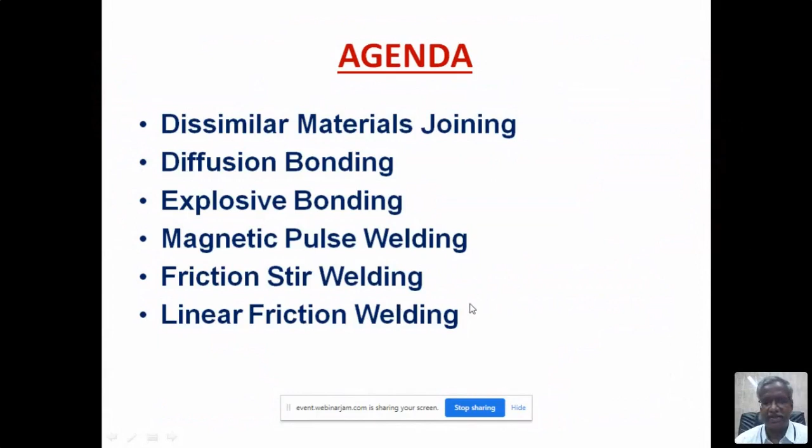So today I just want to share my experiences with joining techniques for dissimilar non-ferrous alloys. I will try to cover based on the time limit available. Briefly, I will introduce the concept of dissimilar material joining. There are many joining methods available, but I want to focus on these 5 joining technologies in today's lecture.

So why do we need to join dissimilar materials? Mainly, in the present day, whether it is a transport vehicle, aircraft, or shipbuilding industries, the main motto is we need to reduce the weight of the structure. To reduce the weight, in some portions of the components, we need to replace the high density material with a low density material. So that's one reason.

Another reason is there are methods to improve energy production and also to create the next generation. Even in the medical field, we need to create a lot of medical products and medical devices, and many other manufacturing industrial uses require joining of 2 different materials. Actually, there are 3 different classifications of dissimilar materials.

Here it shows joining of different types of metal. So two types of metal: one is steel with nickel, copper with aluminum, copper with stainless steel. If you see that, the melting point is different. Steel has a different melting point, and nickel has a different melting point.

Similarly, copper and aluminum. Copper's melting point is 1050 degrees centigrade. Aluminum's melting point is 650 degrees centigrade. Similarly, copper with stainless steel. So these are entirely two different types of metals.

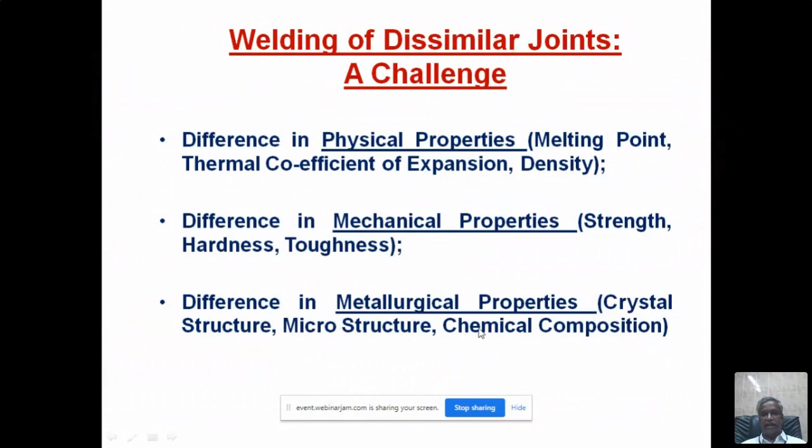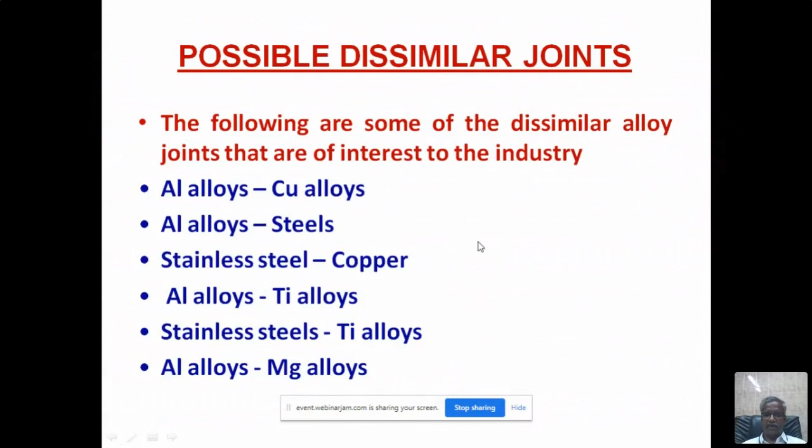So these are all challenges, because joining a similar category of material is itself a challenge. But when you want to join two different types of materials, it is a big challenge for welding engineers. So there are many combinations now used in industry: aluminum with copper, aluminum with steel, stainless with copper, aluminum with titanium. Different combinations are worked out, and they are successfully welded now.

So there are many methods, many techniques, many technologies used to join dissimilar materials. For today's lecture, I want to cover five different processes which we have facilities for in our center, and we also did a lot of work on these processes.

I want to share some of the experiences of this. So first one is the diffusion bonding process. Diffusion bonding is mainly caused by the diffusion of atoms, the movement of atoms from one location to another location. This movement of atoms will occur mainly because there is a gradient, a thermal energy gradient, and then the atoms will move from one place to another location.

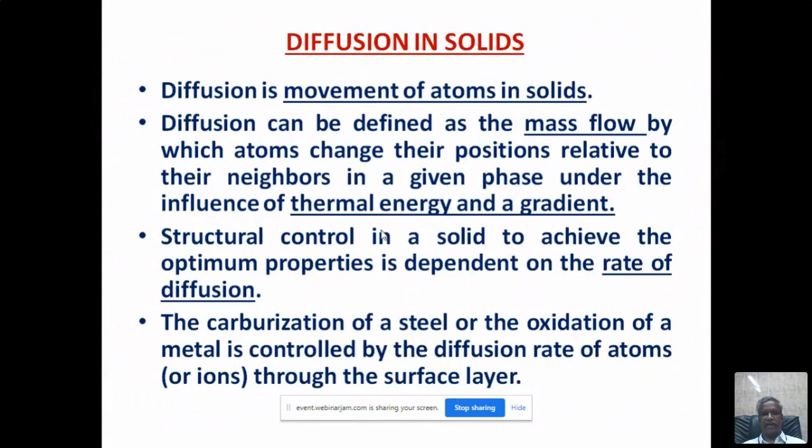There are many examples, and if you see this, I want to join copper with nickel, copper alloy with nickel alloy. These red atoms are copper atoms and these blue atoms are nickel atoms. You require high temperature. When you heat to high temperature, these red atoms will move towards the nickel side, and nickel atoms will move towards the copper side.

So there is a concentration difference between them, and in between they will meet. Copper atoms and nickel atoms will meet, and they will form some intermetallics, and by that the bonding is occurring here. You can see in this diagram clearly. Copper atoms move in this direction, and nickel atoms move in this direction; from copper, it is moving here.

In this case, for copper and nickel, the atomic size is almost similar, so they are replacing. If the nickel atom moves towards this side, there is a vacancy produced here. That vacancy is filled by the copper atom, which is moving in the opposite direction. Like that, the vacancies created by the movement of atoms will be filled by the movement of atoms from the other side. So after diffusion bonding, if you measure from the top surface to the center, the copper concentration will vary, and nickel concentration also will vary, as shown in this graph.

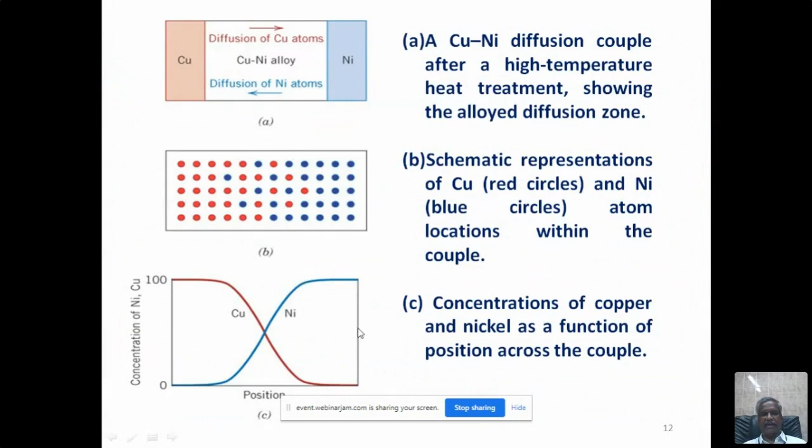And there is a law, popularly known as Fick's law. There are two laws. One is steady state diffusion, the other one is non-steady state diffusion. In steady state diffusion, the diffusion rate is not a function of the distance and the time. But in the non-steady state, it's a function of distance and time. That's called Fick's second law.

For this diffusion process to occur, there must be an empty site, a vacancy site. And the second condition is the atom must have sufficient energy to break the bond, because between the atoms there is always bonding. Metallic bonding is there, ionic bonding is there, you heard about covalent bonds, and there are forces like van der Waals forces.

So if one atom wants to move from its original location to another location, first it has to break its bond from the neighboring atom. Only then it moves. To get that energy, it requires an external source of energy. So when you heat, they get the energy, the atoms break from that bonding, and then it is free to move from its original location to another location. Even then, there should be a vacancy, then only it will move. Otherwise, it cannot move.

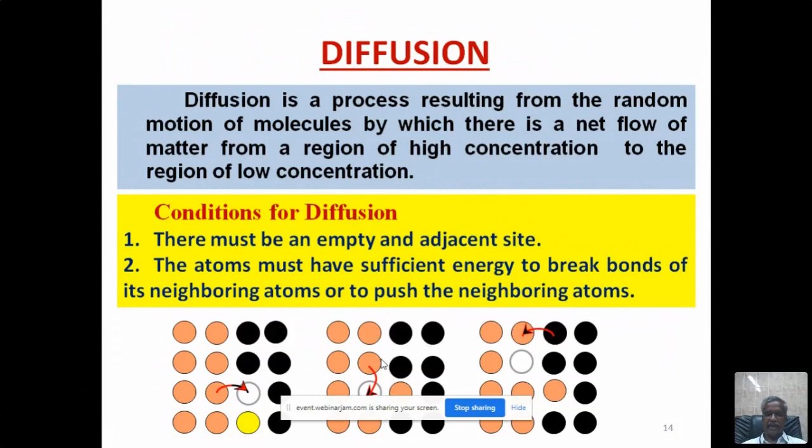If you see here, there is a vacancy. This white spot is the vacancy. So this pink atom will move to the white space, the vacant space. In the next one, this area will become vacant, so this atom will move from the top to here. In the next case, this will become vacant, so this atom will move here. So cyclically, movement of atoms will occur.

So this is the basic: when you want to join two different materials, the atoms will move from one material to the other material. To move the atoms, you need some temperature. You need to heat the material. Only then the atoms will move by breaking the bonds between the atoms. So basically diffusion bonding is a solid state welding process.

Why is it called a solid state welding process? Because there is no melting at all here. In the solid state itself, well below the melting point of both the materials, the bonding will occur. Normally, people used to say welding means there should be heat, and that heat should melt the material. The material will be taken to the liquid state. In the liquid state, coalescence or fusion will occur.

But in the solid state welding process, there is no such phenomenon. The welding or bonding takes place well below the melting point, so the material will not be taken to the liquid state. In the solid state itself, this movement of atoms is happening, and because of that, the bonding is occurring. So there is no macroscopic deformation. Microscopically there will be deformation, but at the macroscopic level there will not be any deformation in this process.

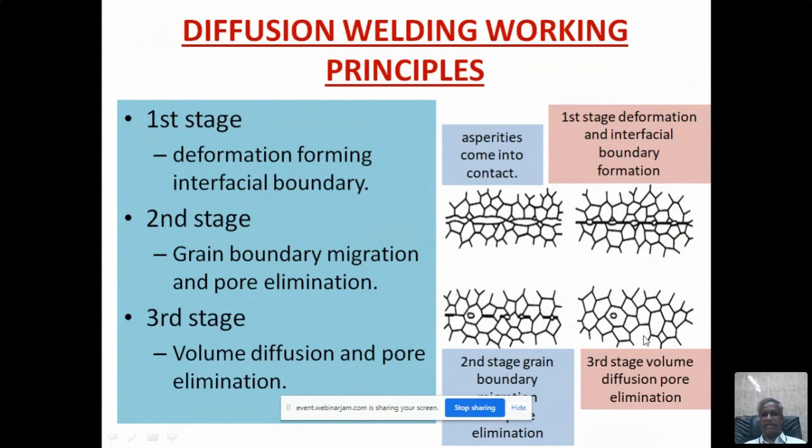In diffusion bonding, you have two types. One is solid phase diffusion bonding, the other is liquid phase diffusion bonding. In solid phase diffusion bonding, there is no melting at all. In liquid phase diffusion bonding, they use interlayers. Interlayers are low melting materials, and those interlayers will melt. That's why they call it the liquid phase diffusion bonding method.

Normally, for both types of diffusion bonding, you require a vacuum atmosphere. The air will be completely sucked out. Vacuum should be maintained, and heat is supplied by induction heating, along with pressure. So these are the main things: you require vacuum, heating, and pressure. The process also requires a good surface finish on the metal surface, normally in the range of 0.4 microns, and the surface should be as clean as possible.

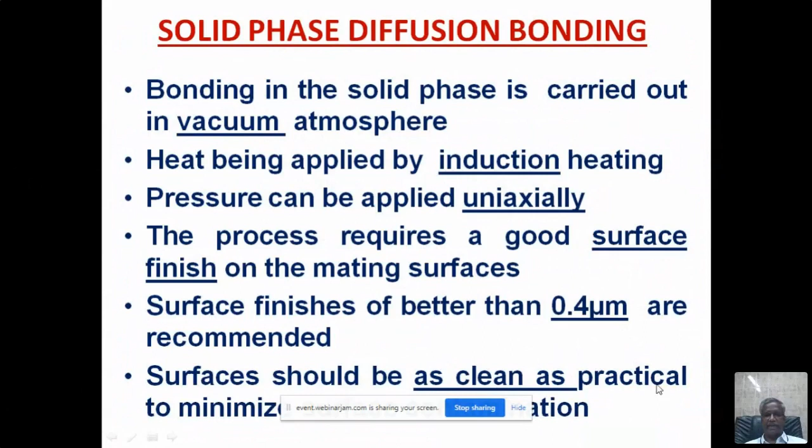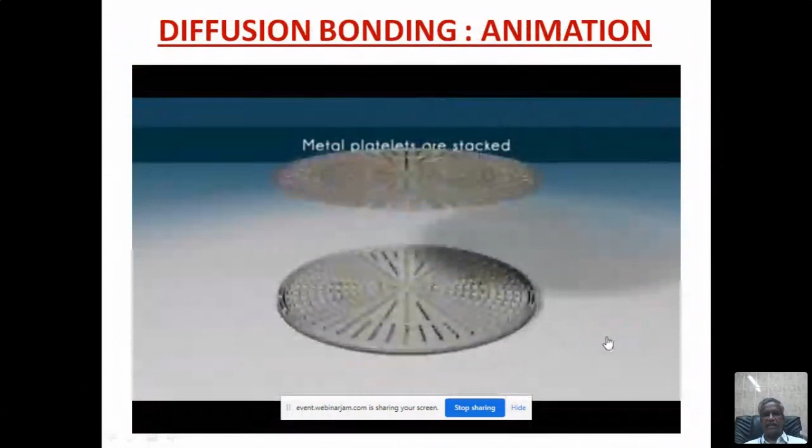There's a small clipping animation. You can see first they are stacking the metal. You can stack any number of metal plates. It is based on the furnace volume. So now dynamic load and heat are applied.

So when the heat and the load is applied, you see that the grains are migrating. Migration of grains and closure of the pores. And once it is closed, then you will not see two different materials. So this is an example for the similar materials.

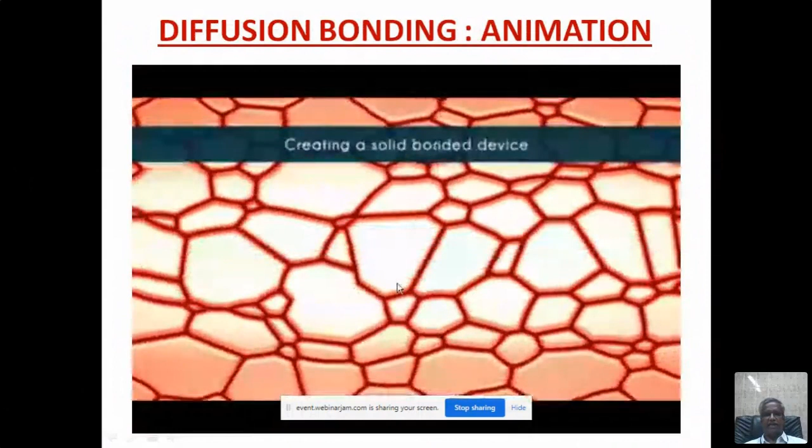So the liquid phase bonding is applicable for dissimilar material combination because in dissimilar material, as I told you, there is a difference in melting point. So the melting point differs. For example, suppose I want to join aluminium with stainless steel. Aluminium's melting point is 650 degrees centigrade, but the stainless steel melting point is 1550 degrees centigrade. So enormous difference, nearly 900 degrees centigrade difference.

So if you heat at 700 degrees centigrade, aluminium will melt. But if you don't heat to that temperature, what will happen? Nothing will happen to the stainless steel. So in that case, they use dissimilar inserts. The inserts are normally silver. Silver will be used. Sometimes copper also will be used. The low melting inserts will be used in between the two different materials.

So the inserts will melt, and the melting will make the inserts in the liquid state, and they will spread onto both the surfaces of the top plate and the bottom plate, like how it happens in brazing. So this is called liquid phase diffusion bonding. So here there is no melting in the materials to be joined. Only the inserts, which are low melting material, will melt. So that's why it's called liquid phase diffusion bonding.

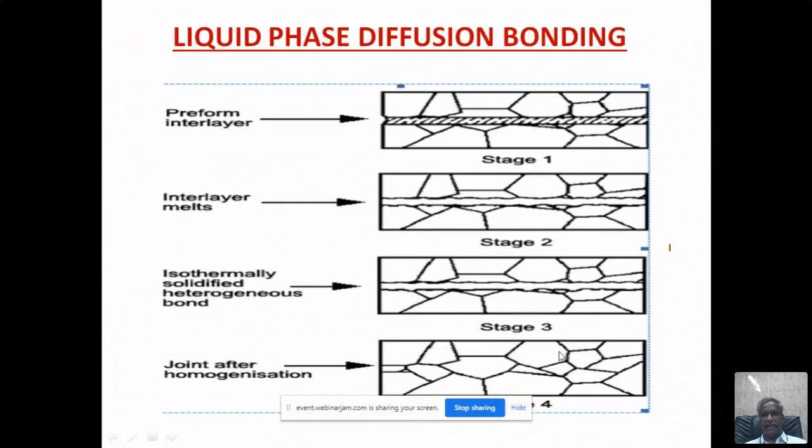So here this is the interlayer. They will keep it like this, and in the second stage the interlayer melts, and in the third stage it is heterogeneously bonding, and the molten interlayer will spread to both the sides, and it will cause the bonding between the two materials.

And there are a lot of criteria that should be considered for diffusion bonding. Surface roughness, it should be 0.4 microns. Bonding pressure should be high enough, but it should not exceed the yield strength of the material. Because if the bonding pressure exceeds the yield strength of the material, then deformation will occur. So you should maintain the pressure well below the yield stress.

And another important parameter, bonding temperature, is decided by the recrystallization temperature. Normally, it will be kept between 50 to 70% of the melting point. This melting point is based on the lowest melting point material. So if you have aluminum and copper, you have to take the melting point of aluminum into consideration, and use 50 to 70% of that melting temperature.

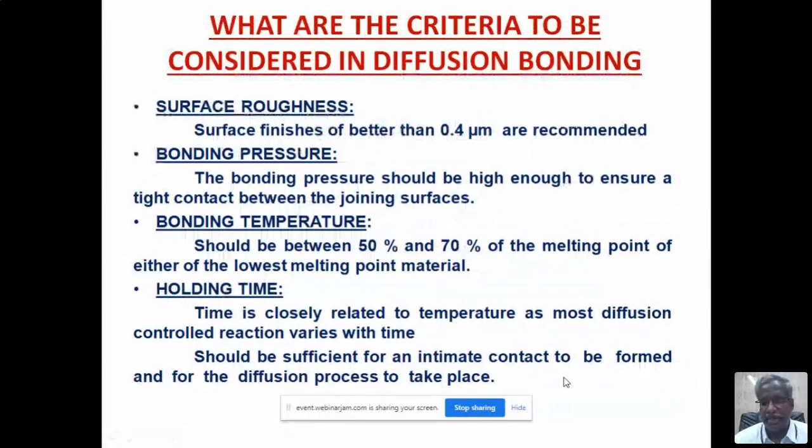Holding time normally varies from 30 minutes to even 3 hours. So it's a long process, a slow process, but some components which cannot be joined by conventional welding methods or any other methods, you can join by using this method, though it is very slow. The productivity is very, very low, but it is required in some applications.

So one case study I will show: we did a lot of work on joining aluminum alloy with magnesium alloy, and this is aluminum alloy. The big challenge is that aluminum and magnesium are both non-ferrous metals, okay? And at the same time, both are lighter in weight, and if you see the melting points, they are almost equal, 600 to 650 degrees centigrade.

There is not much difference in the melting point, but it is very difficult to join these two alloys, aluminum alloys and magnesium alloys. The reason is the crystal structure. Aluminum alloy has FCC, face-centered cubic crystal structure, but magnesium alloy is HCP, hexagonally close-packed crystal structure.

The density is almost the same: aluminum alloy is 2.7 and magnesium alloy is 1.7. Melting point is also close, magnesium alloy is 600 and aluminum alloy is 650 degrees centigrade. But the main problem not allowing the material to join is the crystal structure being different, so they are not compatible.

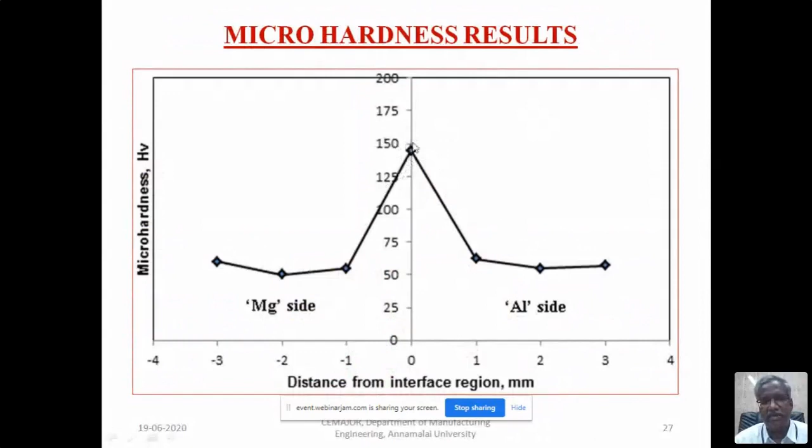For this condition, AZ31B and 6061 were joined using the diffusion method. We did a lot of trials and found that 430 degrees centigrade, a pressure of 50 megapascal, and a holding time of 30 minutes is found to be optimum. That means under this condition, the joints made yield maximum bonding strength.

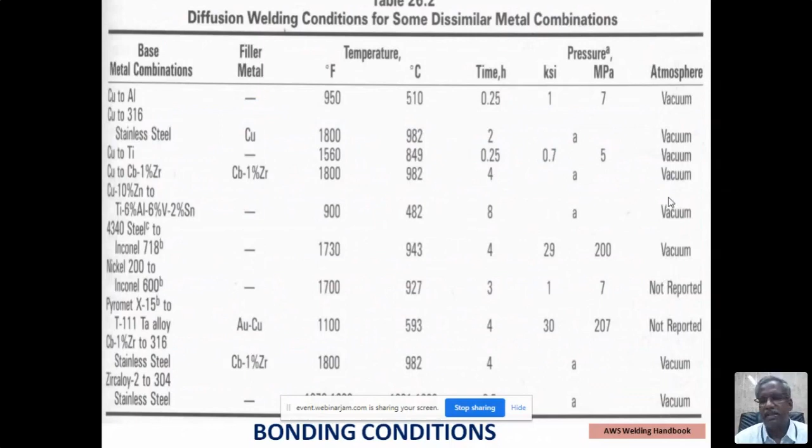There are many combinations of materials available, and people are doing it differently, but if you see, all of them are done in vacuum. So vacuum is a must. Normally they use a vacuum level of 10 power minus 5.

There are a lot of applications in the aerospace industries, because it uses aluminum alloy, titanium alloy, and nickel-based alloys. There are a lot of locations and components where you need to join these different materials. Here's a small video clipping so you can understand this.

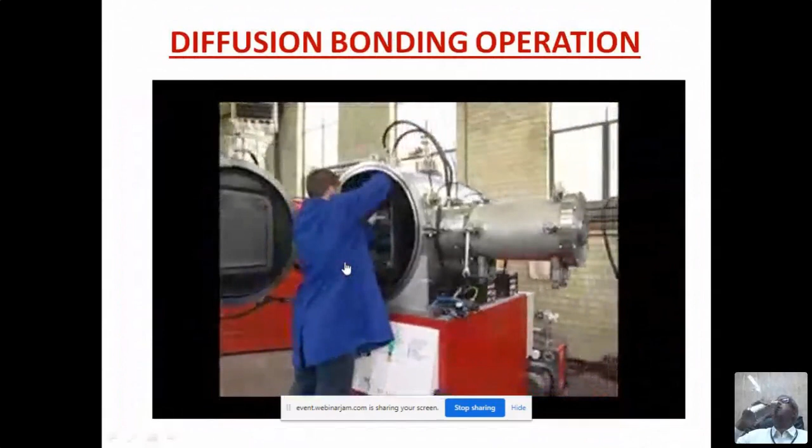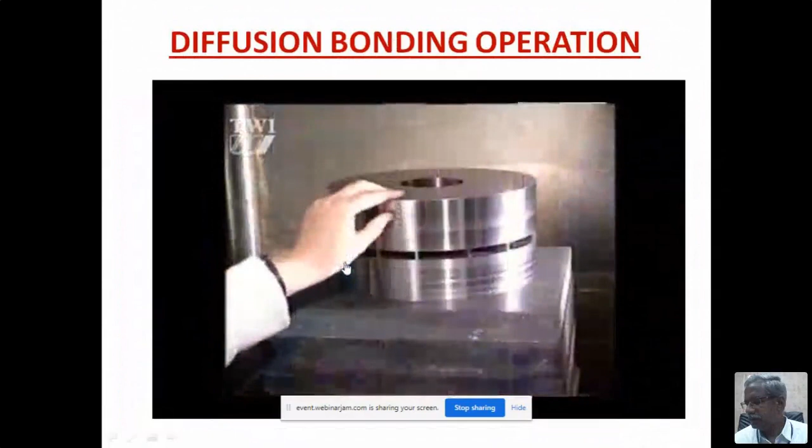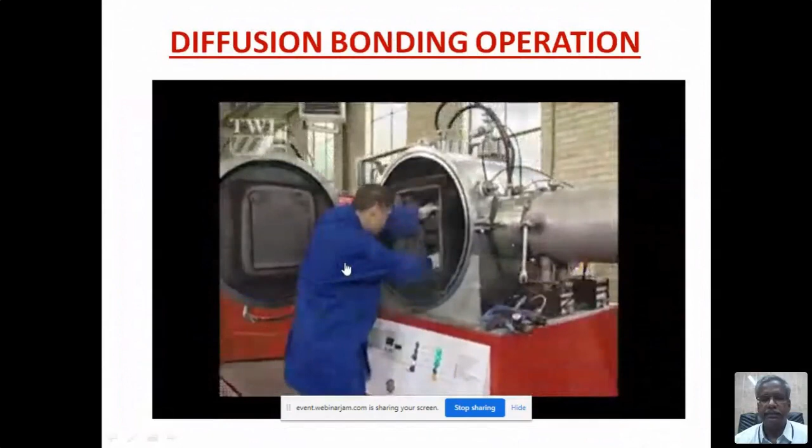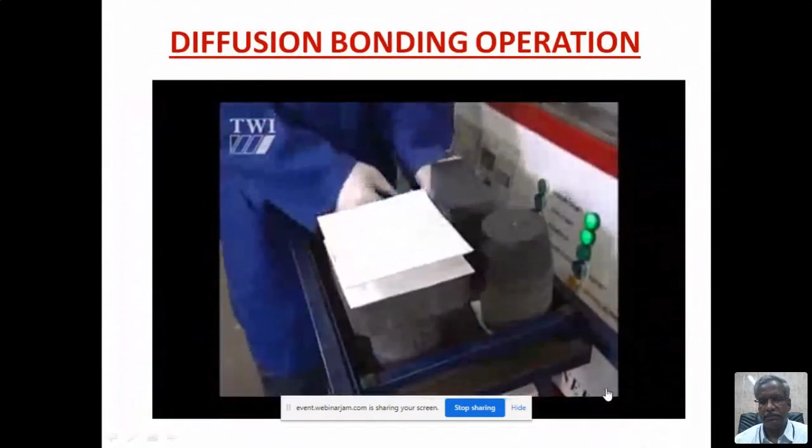It's a very simple process. The equipment is really not a lot more than a hot box with a press running through it. It works on the principle that if you heat components up to the point where the atoms on the surface have enough energy to start jumping across the gap, then they will bond together. So you would take two components with a very good surface, push them together, heat them up, and wait. You form a bond which is metallurgically perfect. If you took a section through that bond and polished it, if you've got the conditions right, you won't be able to see where the bond line is.

And if you then did tensile testing, you would expect the failure to occur in the parent rather than the joint. The new machine is a bit different.

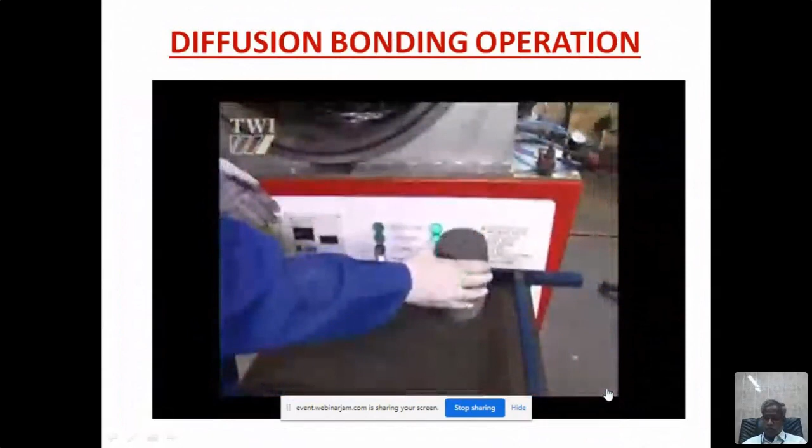Most machines work with a vertical press. This machine has been built with side ports so that we can put the extension tubes on and swing it around horizontally. That way, we're not really limited to length.

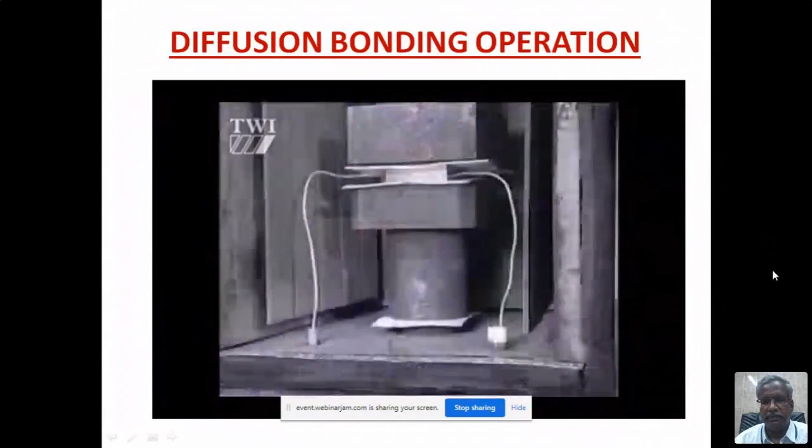Load will be applied. Put longer and longer side pieces on, load is applied to components like tubes, rods, or bars. Measure the temperature. It's a slow process compared with arc welding. You're very unlikely to be able to complete it quickly.

So, the furnace. Inside the furnace, they are stacking the two plates to be joined. This gives unique advantages. For example, it's completely closed, and the suction pump is used to evacuate all the air from there.

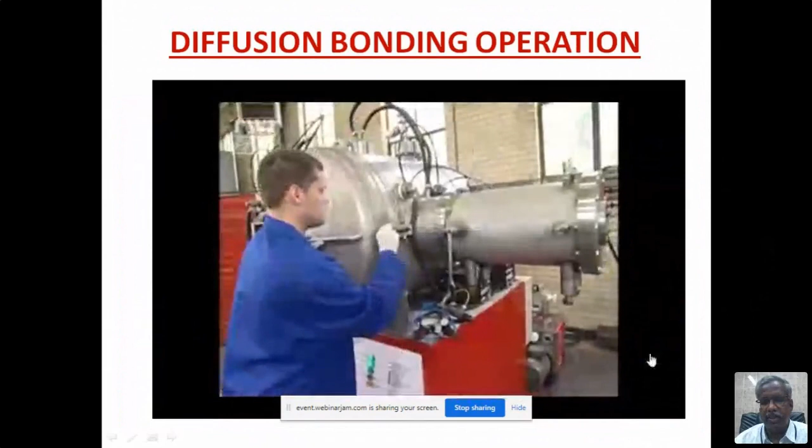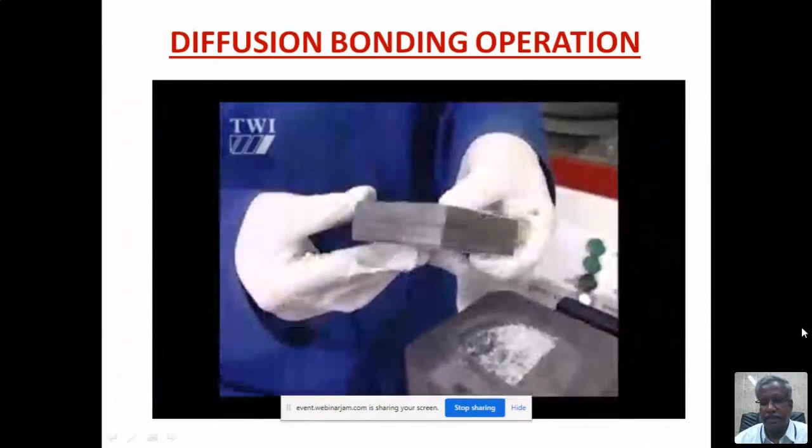So this is how the diffusion bonding works. The video was completed within 1 minute, but the normal diffusion bonding cycle will take a minimum of 6 hours.

Heating will take some 1 to 2 hours, and then you have to maintain the temperature for at least 30 minutes to 1 hour. Then cooling will take another 2 hours. So totally, one cycle will take about 6 hours.

It's a very slow process, but there's no other way. Some of the materials are joined even today using the diffusion bonding process.

So the next one is a very quick process, just opposite to diffusion bonding. It's called explosive bonding. Though it is a very old process, it has many applications in defense.

Explosive welding energy is produced by chemical energy. Explosives are chemical substances, and the energy available in them is used to make this bond. The bonding between the two materials, whether similar or dissimilar, produces a metallurgical bond.

The quality of the explosive-produced weld primarily depends on the state of the interface between the components. There are two setups normally people use, and we also did a lot of work on this explosive welding, though now we are not doing it.

So there is a base plate and there is a flyer plate above that. You have two materials to be joined. Maybe the base plate is steel, carbon steel, and the flyer plate could be aluminum alloy. You want to join these two.

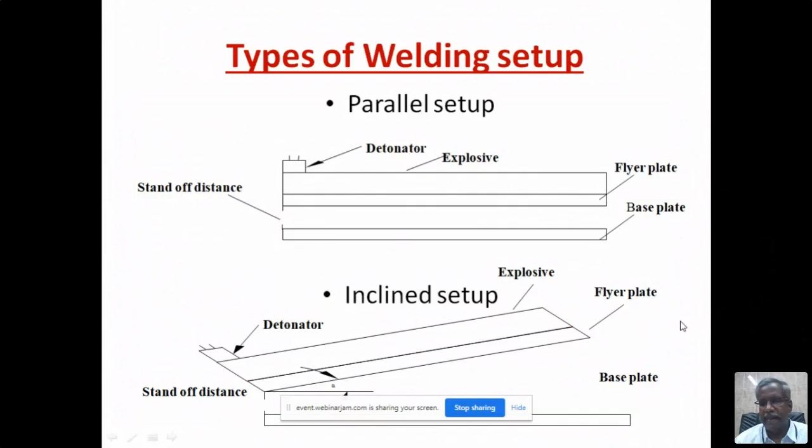This is what happens during the explosion. When the detonator is ignited, it ignites the explosives, and the flyer plate is accelerated. This is the clad layer, that's the flyer plate. Once the explosive is exploded, it makes the flyer plate accelerate at high velocity to impinge, or collide, and hit the top surface of the bottom plate.

When they hit, a lot of pressure is produced, and there is a jet at the interface. That jet is produced due to the collision, and it removes all the surface layers. Even if there is any rust or oxide present on the surface, it will be removed by this jet.

This jet is produced mainly because of the collision between the flyer plate and the base metal plate, because the collision is not a small collision, it's a very high velocity collision. This is what happens at the interface.

Because of the collision, the material at the collision point will behave as a fluid, a highly compressive fluid. Even in the solid state, they behave as a fluid. Because of this, some of the material will deform. The bottom plate deforms like this, and the top plate deforms like this.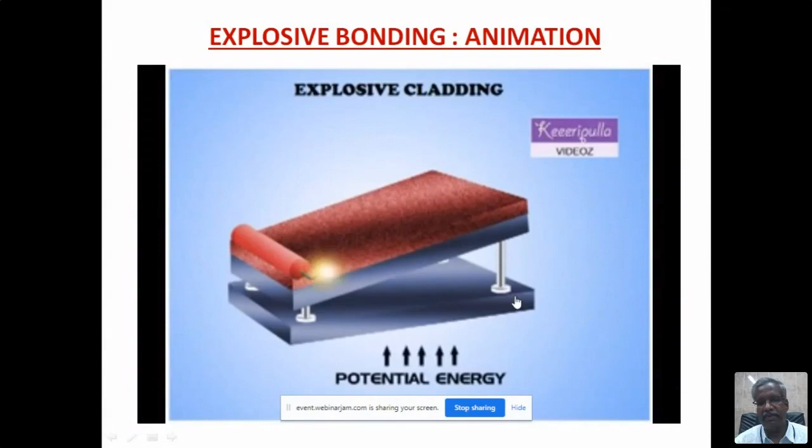The explosive is packed and the detonator is placed here. The inclined surface creates a standoff distance. Now the detonator is operated, and this produces the bonding. You can understand it better in another clip.

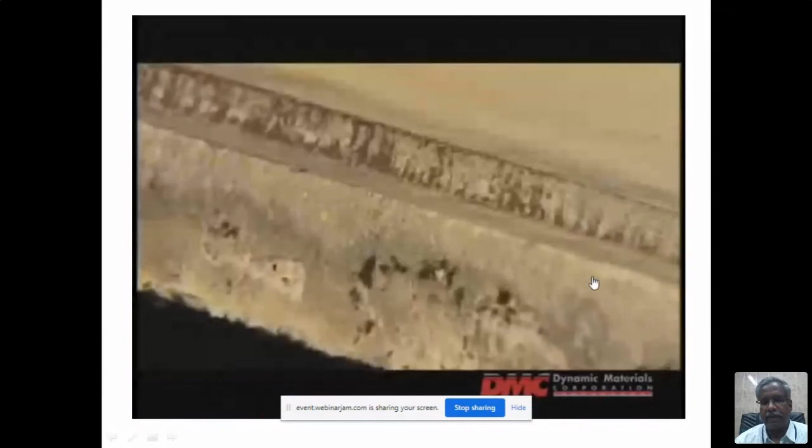With a strength measured in millions of pounds per square inch, explosion welding can accomplish what no other welding method can: join nearly every kind of metal combination, two plates, no matter the type or composition. You can join very huge plates like this in one shot.

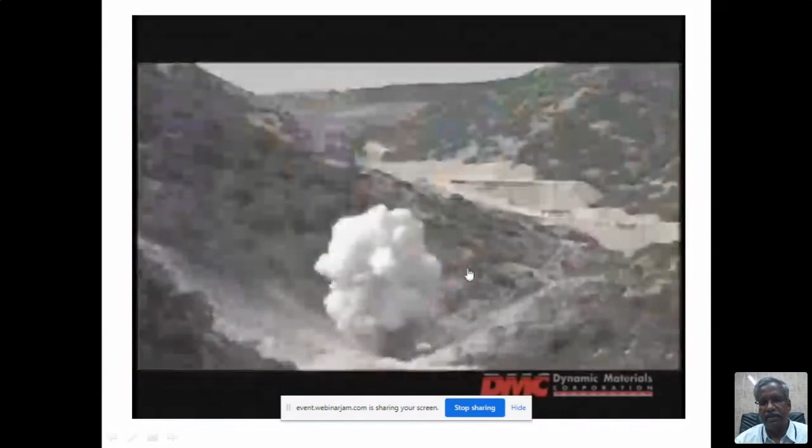To create an explosion weld, the surface is covered with a high-powered explosive, spread here. When detonated, the downward force of the explosion welds the two pieces together through a combination of intense force and remarkable physics.

The explosion welding process begins as soon as the two metal plates arrive at DMC's production facilities. To maximize the welding force of the explosion, the surfaces of each plate are ground as uniformly flat as possible, a process that also removes any rust, oxides, and other surface contaminants. They are then ready to be assembled into the pack, which locks the plates in position for the explosion.

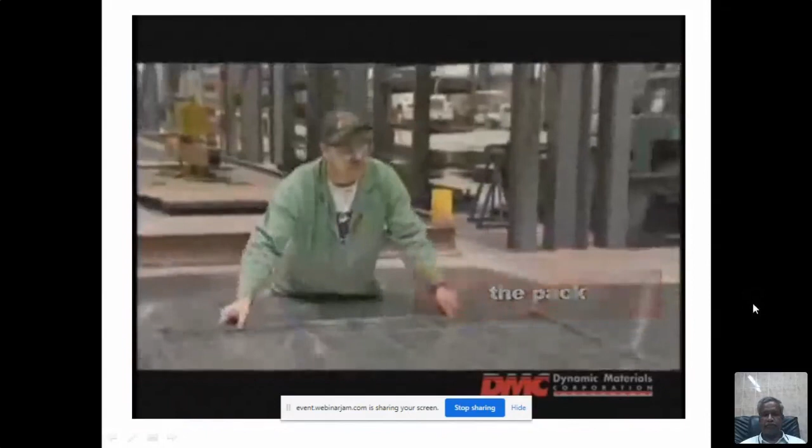To build a pack, the stronger and thicker of the two plates is laid face up. From now on, this plate is identified as the backer. They maintain a small standoff metal distance.

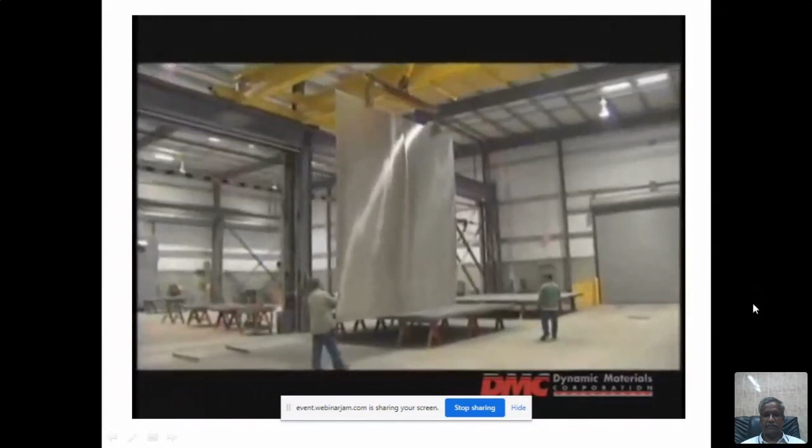Spacers of equal height are then tacked onto the surface of the backer in a uniform grid. These spacers maintain a set gap between the backer and the second plate, placed on top. This second plate, thinner than the backer, is called the clad. The standoff gap between the backer and cladder is less than an inch in height, yet without it, the explosion weld would be impossible.

DMC uses an explosive product with a proprietary chemical formulation. You have to maintain some standoff distance between the top plate and the bottom plate. The exact amount and formulation is always matched to the types of metals involved in the packing of explosives.

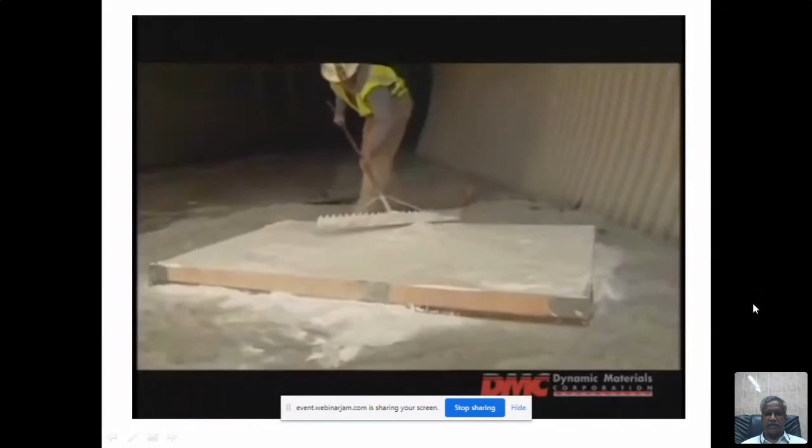Once the pack is set, the explosion is initiated at one end of the clad and moves across the upper level of the pack at a uniform speed. This explosive front progressively drives the cladder plate downward toward the backer at the slight collision angle caused by the standoff gap. Forward of the collision point, air is forced out of the gap at high velocity.

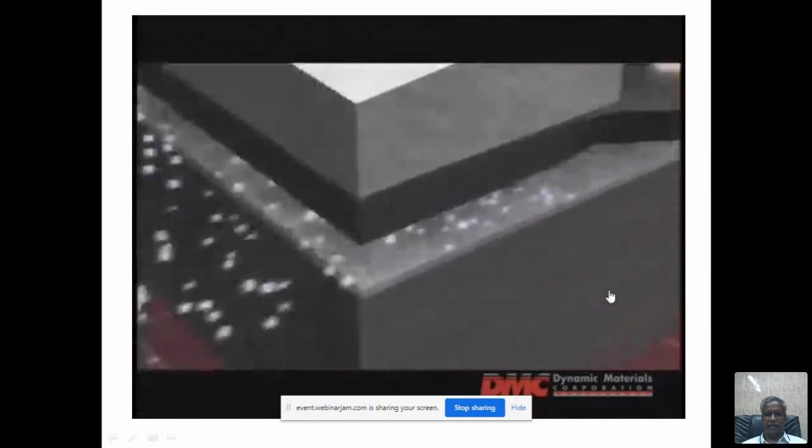All oxides and impurities are expelled, rendering the plate surfaces metallurgically pure and ideal for a weld. As the backer and cladder collide, the weld is created nearly instantaneously across the entire surface of the plate.

So another animation, you can see how the surface layers are removed. Because of the collision at the interface, as I told you, a lot of energy is produced, and these particles which are coming out are all the oxide particles removed from the top surface of the flyer plate and the base plate. So at the collision point, you will get this type of a jet.

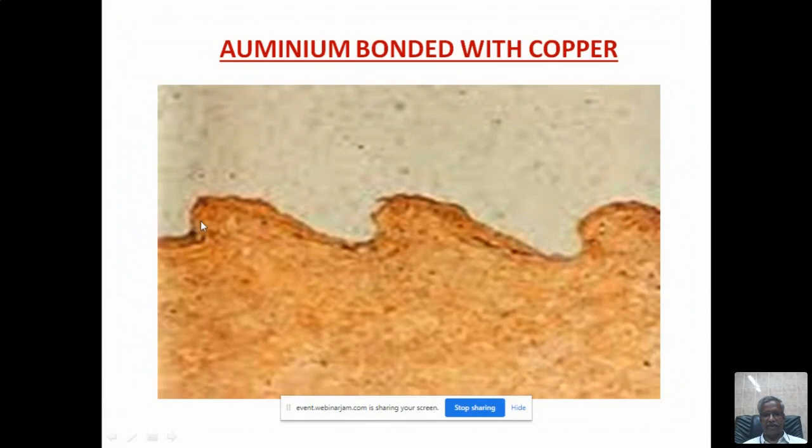So this, from this point to this point, is called the wavelength, and this is the amplitude of this wave. The amplitude of the wave will decide the bonding strength. If the amplitude is higher, then the bonding strength will be larger. And there are many parameters to control.

So type of explosive, what explosive you are using, low explosive, medium explosive, high explosive, that depends on the detonation velocity. And explosive loading, which I told you, E by M, the mass of the explosive to the mass of the flyer plate, and collision point velocity, collision angle, 30 degrees, 45 degrees, 60 degrees, and thickness of the flyer plate, and the standoff distance, whether you are keeping 1 mm or 1.5 mm or 2 mm. And then flyer velocity, thickness of parent plate, that also will play. And angle and surface finish, they all will play.

But majority, the type of explosive, explosive loading, the collision angle, flyer plate thickness, standoff distance, these 5 parameters will play a predominant role in explosive cladding over the other parameters. So there are different types of explosives available today in the market.

RDX, you hear about it in the movies also, PETN, TNT, trinitrotoluene, lead azide, Detasheet, ammonium nitrate, special gelatin. This special gelatin is the low explosive, which is very common. If you go to any quarries, to the Kallakurichi or Salem side, you will find a lot of quarries, they use this special gelatin. Ammonium nitrate, you can develop this in the chemical lab. So these, in the 2000 to 3000 meters per second range, will be called low explosives.

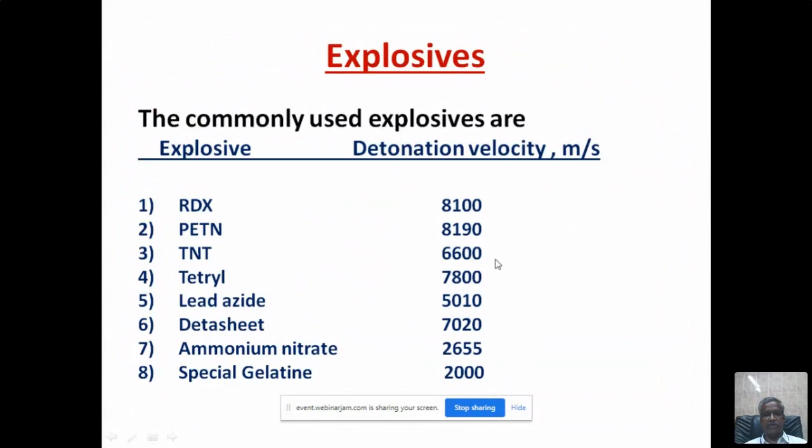Okay, even the lowest explosive, which is special gelatin, if you see, the velocity is 2000 meters per second, that means what? The detonation velocity is 2 kilometers per second. It's a huge speed. But if you take high explosives, RDX, PETN, TNT, more than 7,000 meters per second, they are all high explosives. In between, lead azide and other things come under the medium explosives.

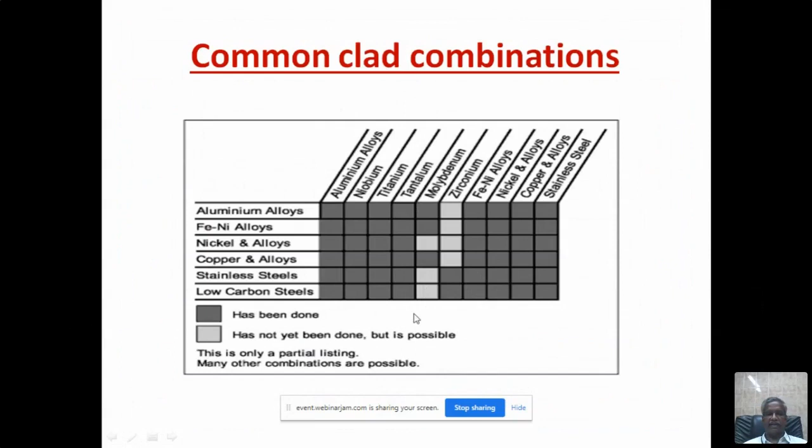These are the combinations not yet tried, not yet researched. So that is the scope for research in explosive cladding. So many advantages. We can join similar materials, steel with steel, or dissimilar materials, steel with aluminum, steel with copper. You can join. The weld area you have seen in the video, there is no restriction. You can do a big plate.

It's even 10 meters by 10 meters. You can join in one shot. And metals having different melting points, there's no need to worry about melting point, and no need to worry about the crystal structure. There are no limitations in this process.

The only problem, the limitation in this process, is that the material to be joined should have some amount of ductility, because brittle materials are difficult to join. Why are brittle materials difficult to join? Because due to the high explosion, high collision velocity, the brittle materials will go into pieces. So that is the only requirement: the materials to be joined should have some minimum amount of ductility.

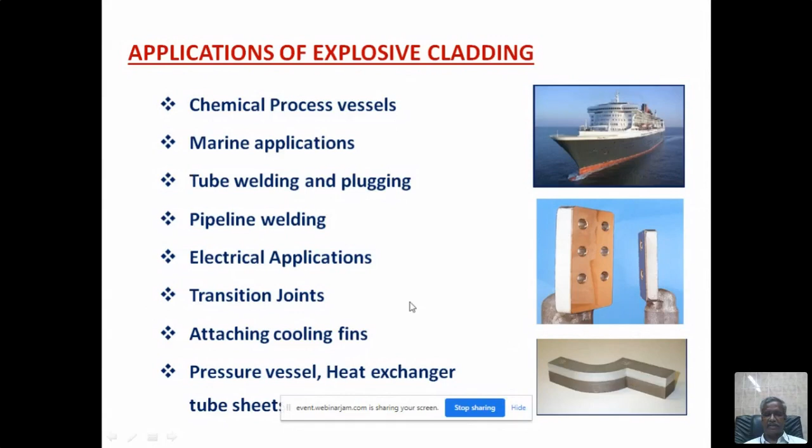If you have a small amount of ductility, something around 10% and more, you can join using this process very effectively. So there are many applications for explosive welding, and here are some of the components produced by explosive welding. Here, not only 2 plates, you can join 2-3 plates, starting from aluminum, then stainless steel, then carbon steel, like that. Any number of plates you can join in one shot. That is the advantage.

So, like this, domes you can form and then weld. There is a process called form cladding. At Annamalai University, in the Department of Manufacturing, we did a lot of work on form cladding. In one shot, you can form as well as bond. The material can be joined.

In India, even now, this process is very widely used in defense, DRDO. In Chandigarh, there is a center called TBRL. They are doing a lot of work on explosive cladding. In other places, the problem is getting a license, because if you want to store explosives, you need a license. Getting a license is a big problem, and there are a lot of norms and conditions to store explosives. That's why not many people are working on this process.

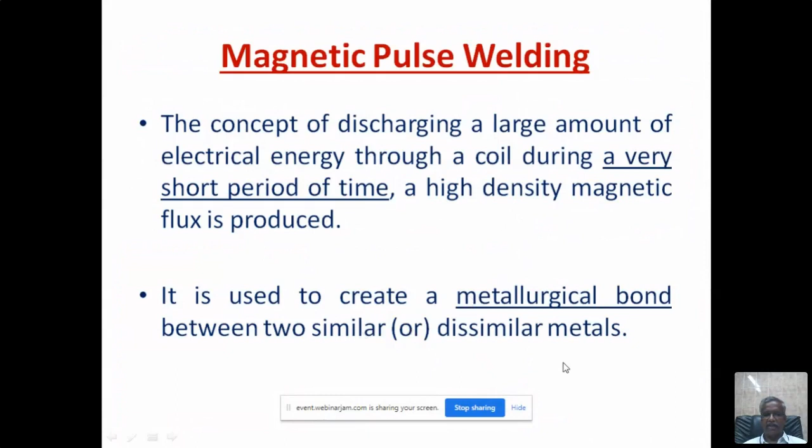So the next process is magnetic pulse welding. This is also a high velocity welding process. It's almost like explosive welding. The only difference is there we use chemical energy in the form of a chemical substance, that's explosives. But here, that high energy is produced by electrical energy. Capacitors and other things are used to produce high voltage, and that voltage is applied for a short period of time. Here also you can join similar and dissimilar materials and get a metallurgical bond. You can join sheets and you can join tubes.

The very important thing here is the magnetic coils. The magnetic coils are made of copper, and the configuration and design of the coils is very, very critical in this process. That is the only challenge: the design and fabrication of the coil for each component. You have to design a coil, you have to fabricate a coil. You cannot use one coil for all the sheets or all the tubes. For each tube or each sheet, one coil is required. It's a consumable.

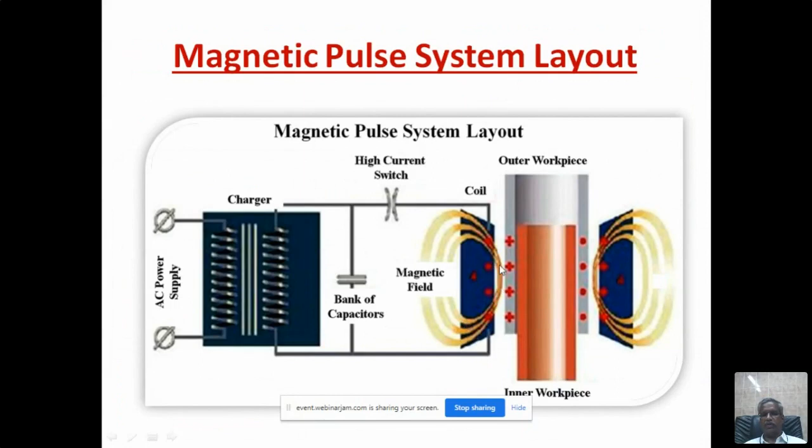Because of the high voltage, the outer workpiece is accelerated towards the inner workpiece. During that time, high-velocity collision occurs. Other things are the same as explosive welding, collision, everything is the same. The only thing is, there they use an explosive chemical substance; here they supply high voltage to accelerate the flyer plate. You can see in this simulation how it is happening. The bonding is taking place here.

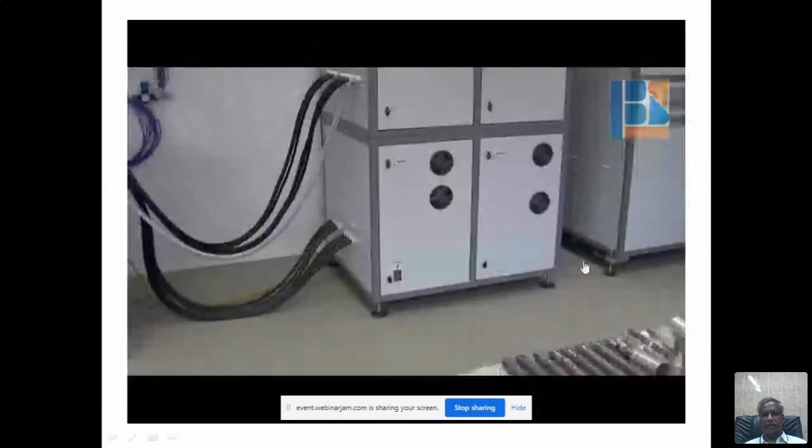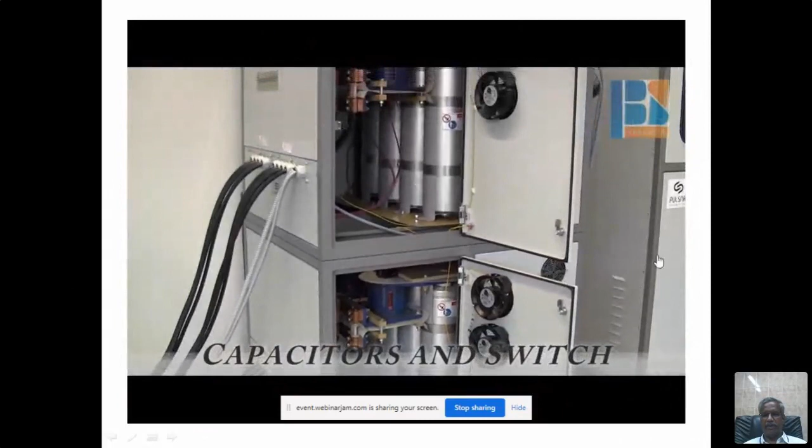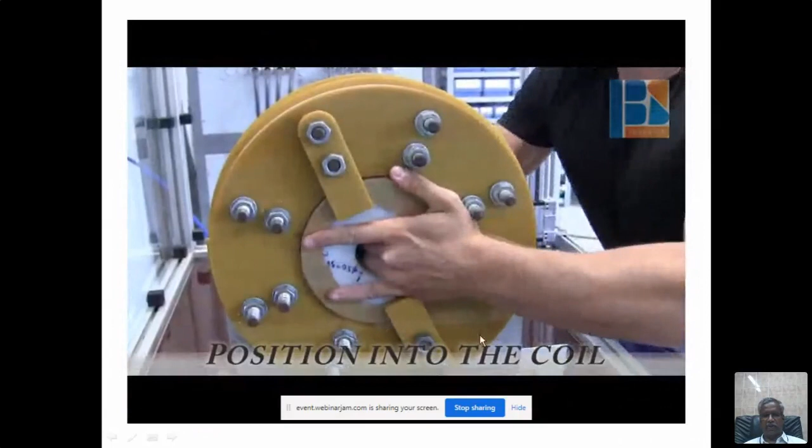So they want to join these two. This is the aluminum tube and the steel former. This is aluminum, this is steel. And this is the magnetic coil, which is inside, and we have this covering. If you observe closely, once you switch it on, a small flash will come. Yes, that's all, over. So the bonding is over. And this is before bonding, this is after bonding.

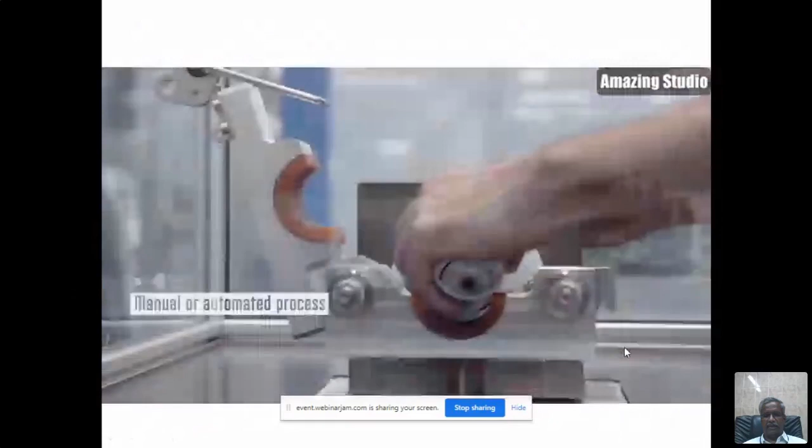Yeah, I'll move to that because it's similar, slightly different. In India, for magnetic pulse welding, there's only one industry having this machine, in the Pune Industrial Estate. The industry name is MagPulse Technologies. He is having a huge machine, imported from France.

And the parameters concerned are voltage, standoff distance, working length, and flyer thickness. Working length is the overlapping length. Not the entire tube is bonded together. Only the overlapping length is known as the working length. These are the important parameters here.

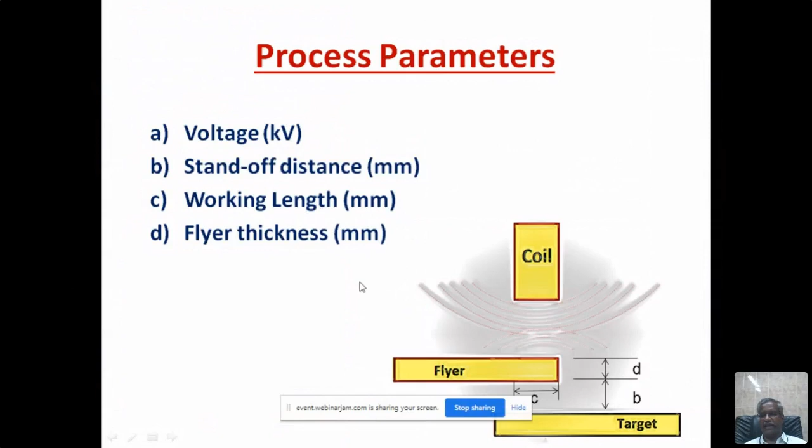So many advantages: highly repeatable, high speed, dissimilar metals are possible, no need of filler metals, green, clean, high quality, and low cost, high productivity. If it is automated, you will produce a very large number. It's finding a lot of applications in automobile components.

And the last topic: friction stir welding. Friction stir welding is also used enormously for dissimilar material joints. I think you have heard a lot about the friction stir welding process. I don't want to tell about the background of this process. It is a solid state welding process.

There is no need of filler metals, no need of shielding gases. There is no need of edge preparation to join, as in the case of fusion welding. So it is an environmentally cleaner process because there is no smoke, no fumes, no glare.

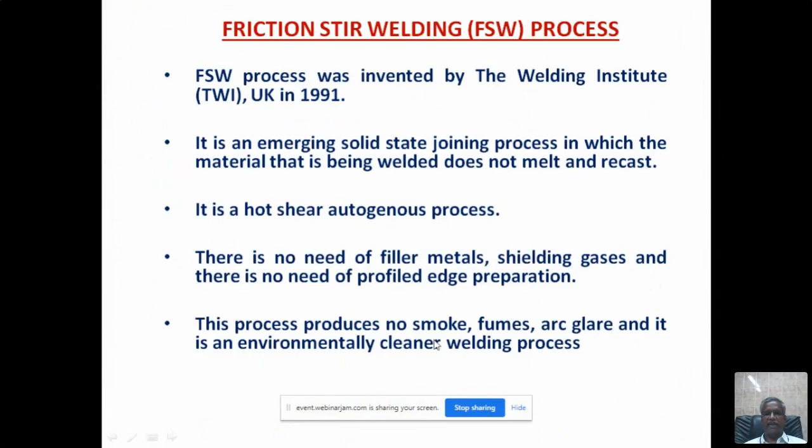These dimensions are very critical to get a successful joint, because the pin diameter should normally be equal to the thickness of the plate to be joined, and the pin length is 0.5 millimeter or 1 millimeter shorter than the thickness of the plate. So the thickness of the plate to be joined will decide the tool dimensions.

So pin length is 0.5 millimeter shorter than the plate to be joined, the pin diameter is equal to the thickness of the plate, and the shoulder diameter is 3 times the thickness of the plate. So the plate thickness will decide the pin diameter, the shoulder diameter, and the pin length.

And this slide will show you how it works. So you have to make the tool. The tool will be fitted to the machine. You fix up the speed, what speed you want to rotate, 1000 RPM, 1500 RPM. Then start the machine, bring down the tool, establish contact between the two surfaces here, and the pin first will establish contact with the top surface.

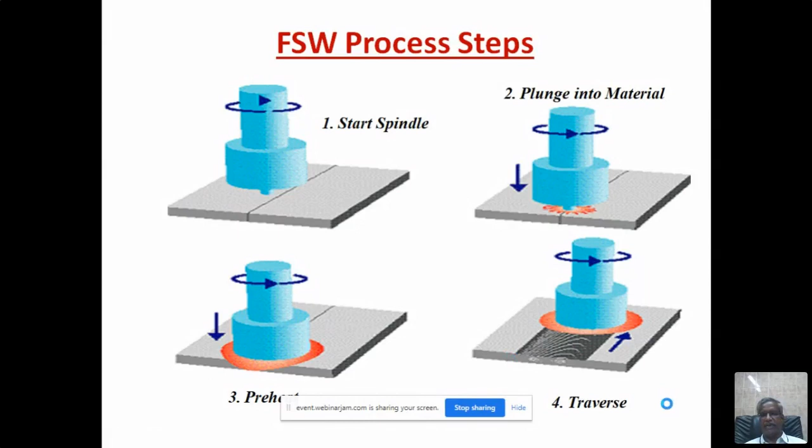So these are the stages. So how it works in the animation: tool rotates, plunging, welding, and then retract the tool. So this is how it works. So the shoulder produces maximum heat. 2/3 of heat will be produced by the shoulder, obviously because it has large diameter. The probe, that's a pin. Pin will produce a minimum heat, but it's not for heat production. It is for stirring purpose. Pin is mainly for stirring the material.

So this process, though it comes under welding, basically it is a metal forming process. Extrusion and forging combinedly will take place during this process. Extrusion and forging process will take place combinedly in this process.

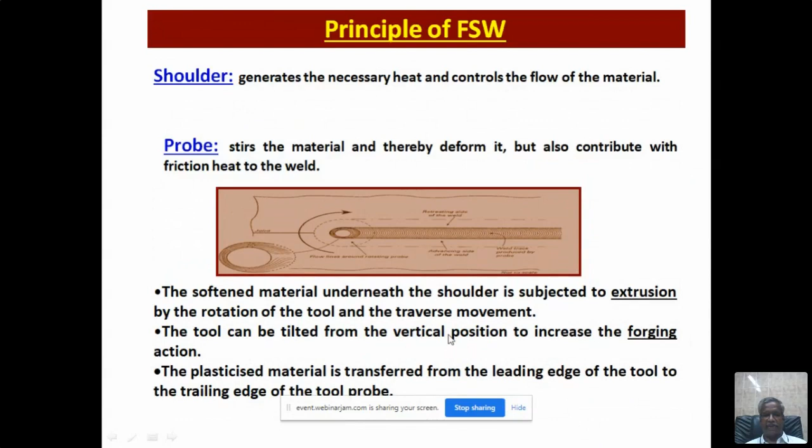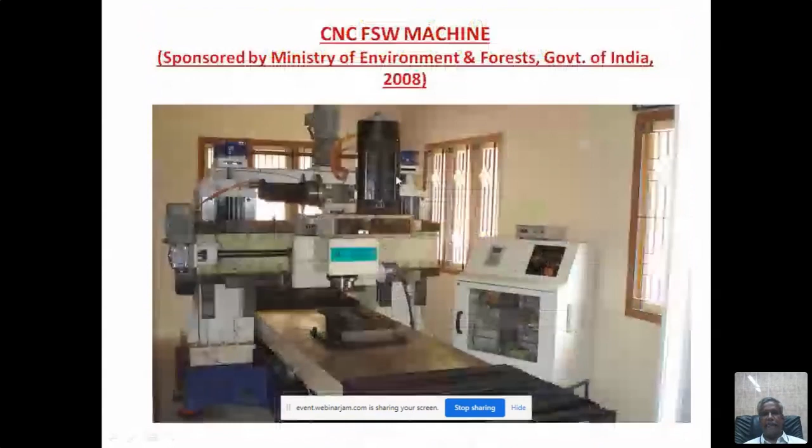Right. So the friction stir welding process now, as on date, is a very good process. It's the best process for joining aluminum alloys, magnesium alloys, copper-based alloys, because there is a boundary of less than 1000 degrees centigrade melting point. If the melting point of the material is less than 1000 degrees centigrade, friction stir welding is the best process. But above 1000 degrees, it has potential, but the main problem is tool material. The tool material is the big challenge here.

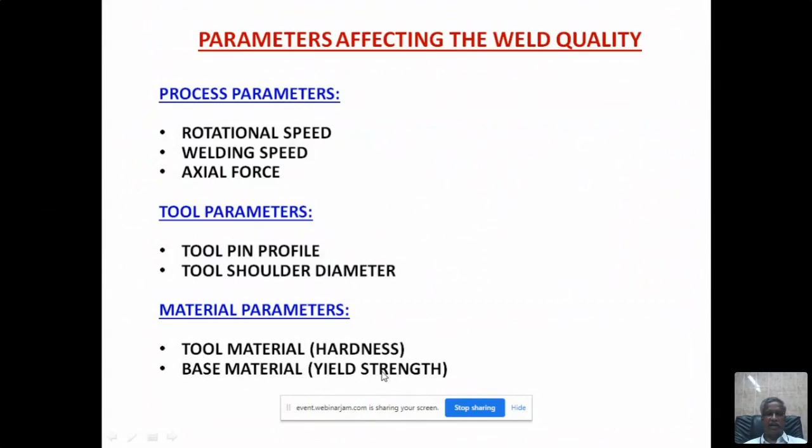But here in the welding speed, it is opposite. Welding speed is faster, heat generation will be lower. Welding speed is slower, heat generation will be higher, opposite effect. So based on this, in this process we need to optimize the parameters.

So there are other defects. Aluminum alloy, magnesium alloy, in fusion welding, TIG welding, MIG welding, produce a lot of defects, solidification related defects, hot cracking, alloy segregation, partially melted zone, porosity. These are the defects in fusion welding of aluminum alloys or magnesium alloys. But in FSW, friction stir welding, those solidification related problems are completely eliminated because there is no melting here. It is a solid state welding process. Welding takes place well below the melting temperature.

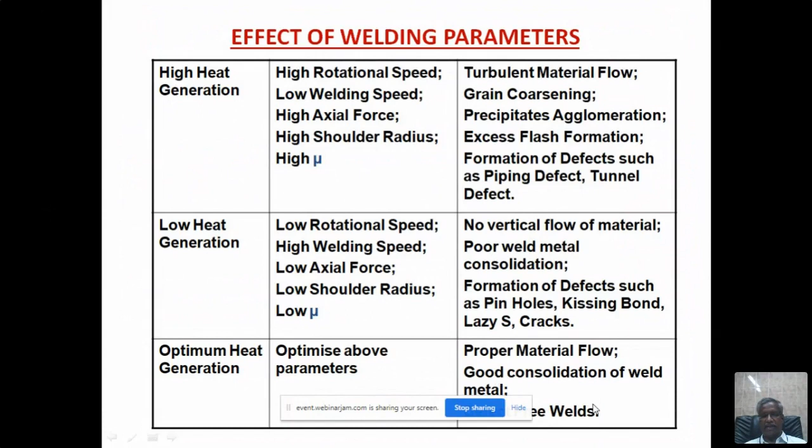And one case study I want to show for dissimilar, because the topic is dissimilar non-ferrous alloys. We joined here 6061 with AZ31B, and as I told you, it's very, very difficult by fusion welding process. When you do TIG welding, a lot of intermetallic compounds will be formed at the interface. So immediately after welding, you can break it by hand just by bending it. The joint will come out in two pieces because of the formation of the intermetallics.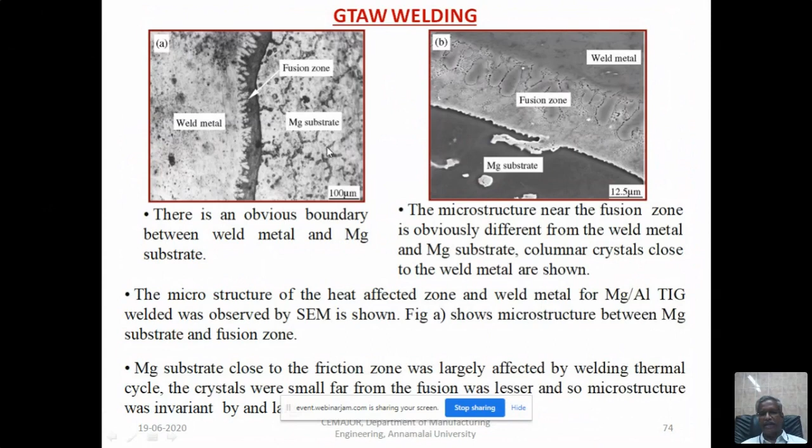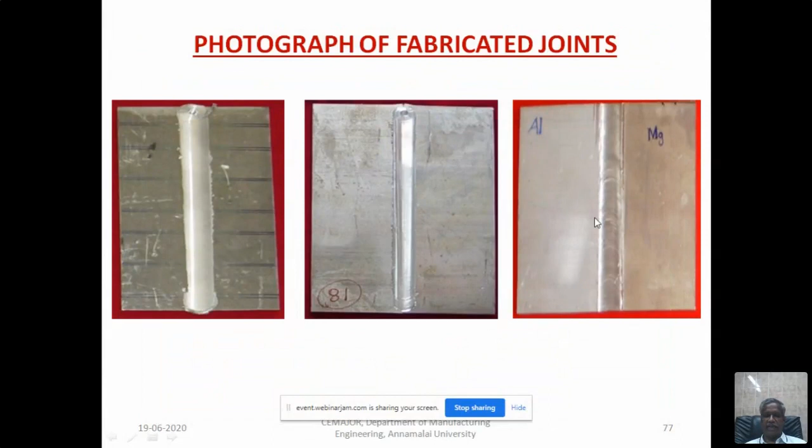And this is the comparison. You see for the aluminum similar joint, we got 244 megapascal tensile strength, and for the magnesium alloy 200 megapascal. And for dissimilar, we got only 140. Even that is better, because in any other process you will not get this much strength, other than the friction welding process.

So this is the macrostructure in similar welding, aluminum with aluminum. You will see the inverted trapezoid shaped friction stir processing zone. Here it is a bell shaped friction stir processing zone in the magnesium alloy. In the dissimilar joint, aluminum with magnesium, you see that it is a straight cylindrical region, and I'll show it in the magnified view.

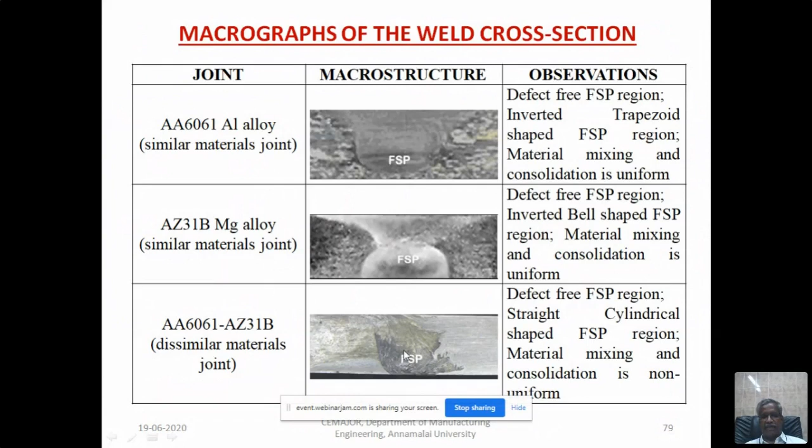So here, mixing takes place, but layer by layer. You see here, aluminum with aluminum, magnesium with magnesium, these two are similar. But in dissimilar, you see the intercalated microstructure. This is known as the intercalated microstructure. The dark region is magnesium and the white region is aluminum alloy. So one layer is aluminum, and the next layer is magnesium. Like that, they will form. There will not be proper bonding, but mechanical bonding took place because of this stirring action.

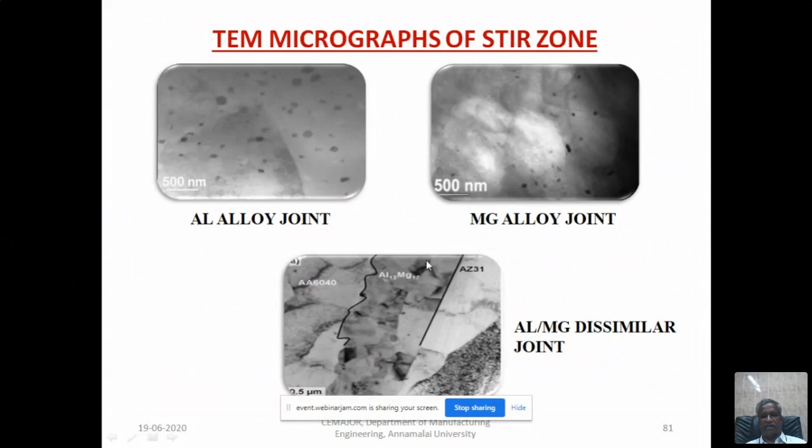And this is the TEM, transmission electron micrograph. The precipitates are fine here, uniformly distributed here also, but in the dissimilar welding, there are a lot of intermetallics. You can see Al12Mg17 and all those things will occur here. That reduces the strength. But we successfully welded, and it is 40% lower than the aluminum alloy, 30% lower than the magnesium alloy, but we were able to achieve 140 megapascal tensile strength in the dissimilar joint.

And finally, linear friction welding, another process. It's a variant of friction stir welding. As I told you, friction stir welding of steels, friction stir welding of titanium alloys, friction stir welding of nickel-based alloys.

It is highly challenging, mainly because of tools. For aluminum, magnesium, copper, you can use high-speed steel. For steels, titanium and other things, you have to go for tungsten-based alloys, tungsten-rhenium-based alloys, or PCBN tools. They are very expensive tools. So when you want to join high-strength, high-melting materials, you need to avoid the tools.

Then this process, linear friction welding, was developed. In linear friction welding, it's entirely different from friction stir welding. There is no tool here. First of all, there is no tool. It is like rotary friction welding.

In rotary friction welding, you use a cylindrical component. Here you can use any profile. Here there is no rotation, only oscillating, reciprocating motion. This reciprocates at a very high frequency. The stationary piece has the forging force, the axial force, applied to it. I'll show the clipping so you can understand this machine. We have a linear friction welding machine.

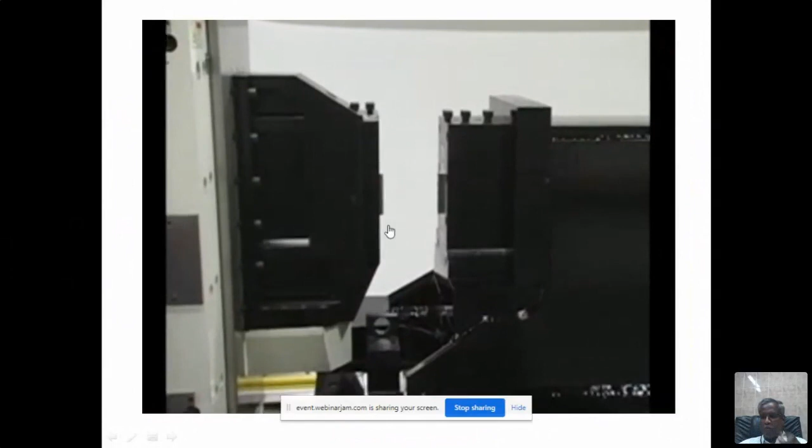How does linear friction welding work? Basically by forcing together pieces to be joined in such a way that linear motion and pressure are converted into heat, which literally bonds the pieces into one part. Two pieces to be joined are aligned in a linear friction welding machine.

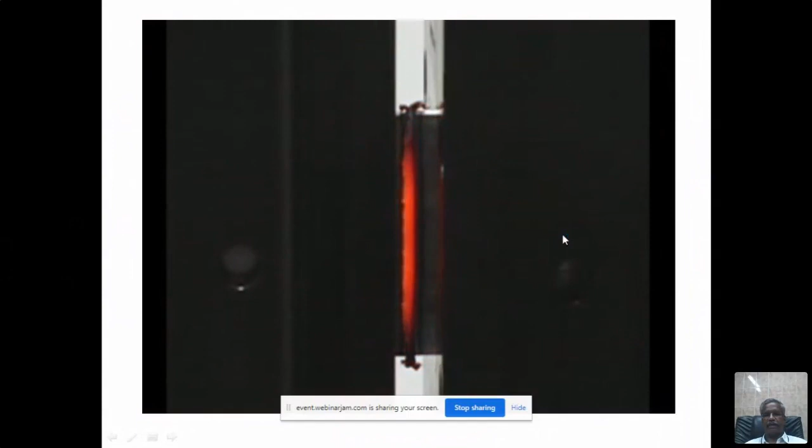One piece is held stationary, the other is oscillated rapidly using a linear actuator. When the linear actuator reaches the reciprocating amplitude of oscillation, an axial force is applied and the moving piece is forced against the stationary piece. Friction between the parts heats the bonding surfaces to forging temperature while displacing parent material.

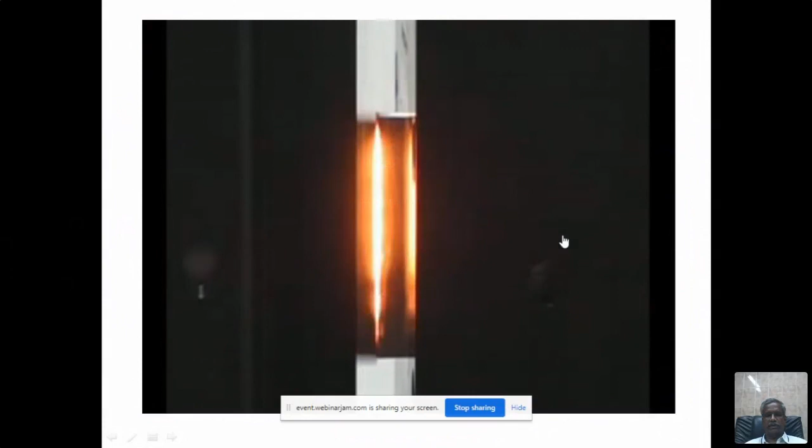The force applied during the process can be varied to optimize the resulting welded component, and these forces are maintained for a specific amount of time or a specific amount of displacement. Once one of these desired criteria is satisfied, the oscillation stops, and the moving piece is returned to the mid-stroke position as the oscillation is stopped.

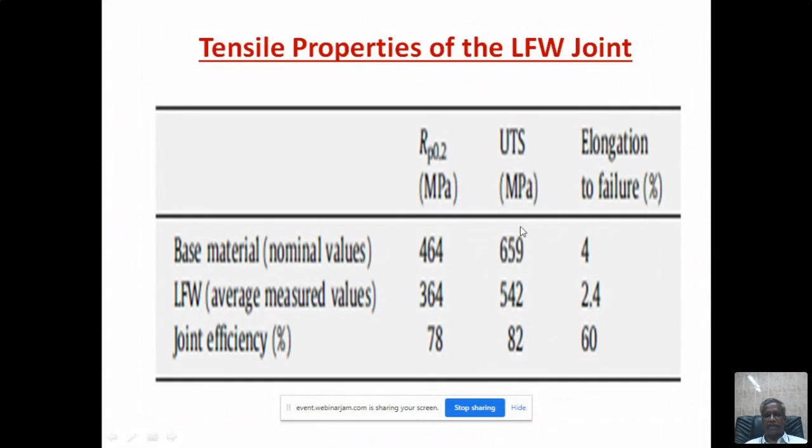You see the ultimate tensile strength: the base metal is 659, the joint is 542. So 82% of base metal strength we are able to achieve by using this process.

And in slow motion, you can understand how it works. One is the reciprocating top piece, and this is the stationary one. At slow speed, you can understand how the deformation occurs and how the flash forms, all due to friction.

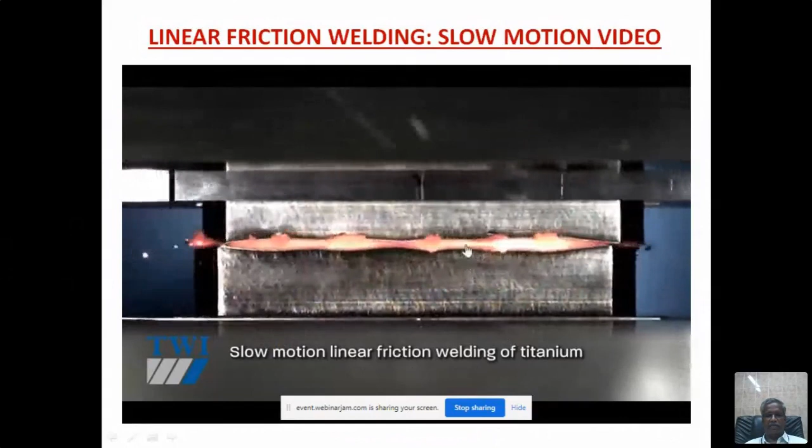Due to friction, heat is generated. The heat, that's the thermal energy, and the mechanical force, that's the downward force, both cause metal to deform from one plate to the other. So by that, there's no welding here in the liquid sense; it is only in solid state.

It's a red hot condition. This bonding occurs, then suddenly the stationary piece has the forging force, or axial force, applied. Then it is allowed to cool, allowed to solidify. Then this joint is completed.

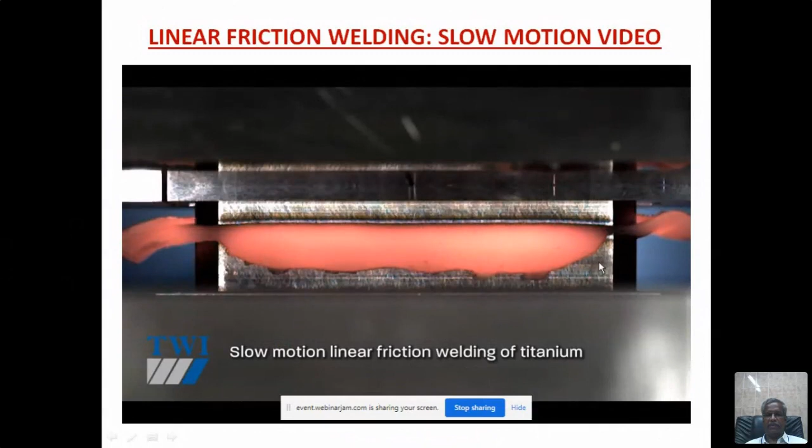The center has completed 40 R&D projects sponsored by DST, DRDO, ISRO, DAE, and many other agencies, worth 10 crores total project cost, and 5 projects are ongoing worth 2 crores. The center has published more than 370 papers in Scopus-indexed journals alone, and has produced 40 PhDs.

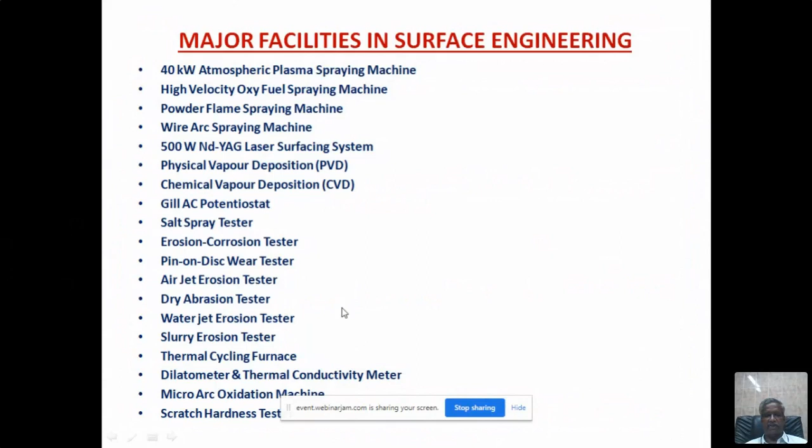We have a very good thermal spray lab with plasma spraying, HVOF spraying, powder flame spraying, wire spraying, and PVD, CVD. We also have a very good tribology lab, corrosion testing lab, and recently developed nano coatings lab. We have EB and sputtering, and this is the photograph of those machines and equipment.

A piece of information for those interested in welding, since my topic is on welding. We introduced a program, ME Welding Engineering Program, a 2 year course, full-time program with industry partnership. The difference between other ME Welding programs and our program is that out of 2 years, 1 year the students

will be in Annamalai University. They will complete all the theory subjects, labs, everything in 2 semesters. The third semester and fourth semester, that is in the second year, the students will be sent to the industry.

We have a tie-up with more than 12 industries. We will send the students to the industry. The students will do the project, an industry-driven problem. They will take the industry-driven problem.

They will stay there in the industry, they will work there, and they will only come to Annamalai University for the progress review meeting. Otherwise they will be working there, and after the end of 1 year, they will submit the project report, and the degree will be awarded.